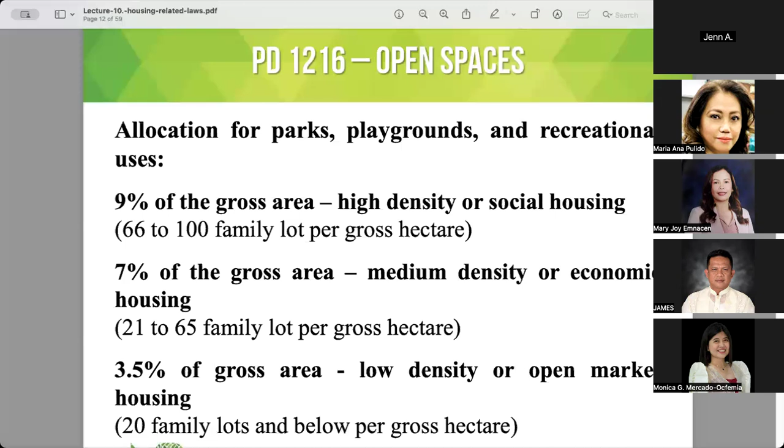Jen, would you like to share now? And also Mary Joy, if you can continue, and please read the provision.

Yes po, ma'am. Okay. PD 1216, open spaces, allocation for parks, playgrounds, and recreational uses. 9% of the gross area, high density or social housing, 66 to 100 family lots per gross hectare. 7% of the gross area, medium density or economic housing, 21 to 65 family lots per gross hectare. 3.5% of gross area, low density or open market housing, 20 family lots and below per gross hectare.

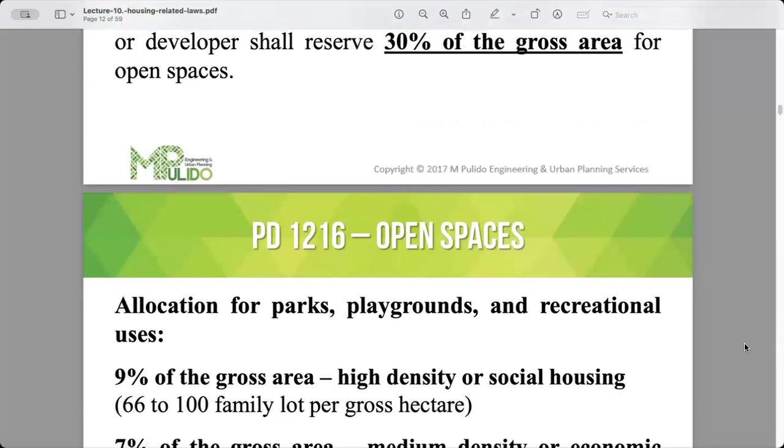Is that the one? Yeah, I think Jen, doon sa mas nauna. So can you read first that one? Okay. For open space, an area reserved exclusively for parks, playgrounds, recreational uses, and other similar facilities and amenities. Section 31, for subdivision projects 1 hectare or more, the owner or developer shall reserve 30% of the gross area for open spaces.

Okay. Mary Joy, in that particular definition, it says it refers to any area within a subdivision exclusively designated for what? Isn't it that we define open space? It refers to any area within a subdivision exclusively designated for what purpose? For parks, playgrounds, recreational uses, and other similar facilities and amenities. Okay, that's good. And then for Section 31, it says for subdivision projects with a gross area of 1 hectare or more, the developer is required to allocate at least 30% of the total area for open space.

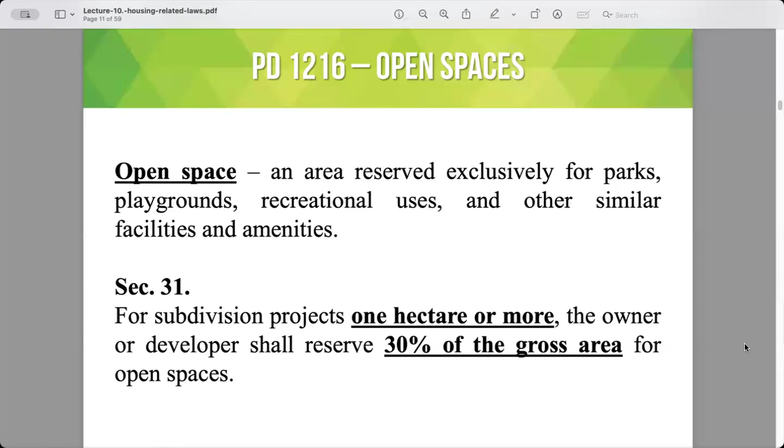So, James, if a developer has a 2-hectare subdivision, how much should be reserved for open spaces? Can you compute that? 30% of the 2 hectares is 0.6 hectares, or around 6,000 square meters po. Okay. So these areas are commonly where barangay halls, parks, multipurpose courts, or green buffer zones are located, and other similar areas. Thank you, Mary Joy and James. So we can now go to the next slide.

Okay. Allocation for parks, already read by Mary Joy kanina. So, let's see. Although PD 1216 originally mandated 30% open space, current implementing standards via HLURB, now DHSUD guidelines, classify open space allocation based on housing density, and so not all of the 30% is intended for parks and recreation alone. And we look at the breakdown that refines how much is specifically allocated for parks, playgrounds, and recreational facilities.

So, Monica, how much is allocated for parks and playgrounds, as you can see? Ma'am, it depends po on the density. Okay, and how about density? So for high density or socialized housing po, which means you have 66 to 100 family lots per gross hectare po, the allocation is 9% of the gross area.

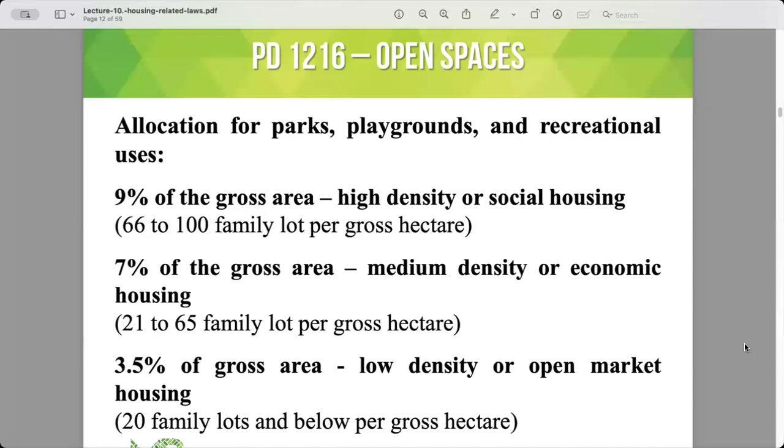So if I move to the next, Jen, can you move to the next one? Okay. And then I'll call again. Jumel, can you answer? Can you unmute? So, Jumel, can you recite again the allocation for the different types of density? Actually, ma'am, it's already revised. Okay. Actually, this is already revised, di ba, ma'am? Anyways. Oh, yeah, we're still talking about 1216 muna, no?

Opo. Okay. Bali, based on the code, PD 1216, 9% for parks and playground with allocation percent of gross area of 9, the total lots or dwelling units per hectare should be 66 and above. Yeah, 66 to 100 family lots. Okay, and then the medium? Yes, ma'am. 21 to 65 under 12-16, 7% of the gross area. Then 20 and below, 3.5%. Okay. So that's under PD 1216, pag tinanong sa inyo, okay?

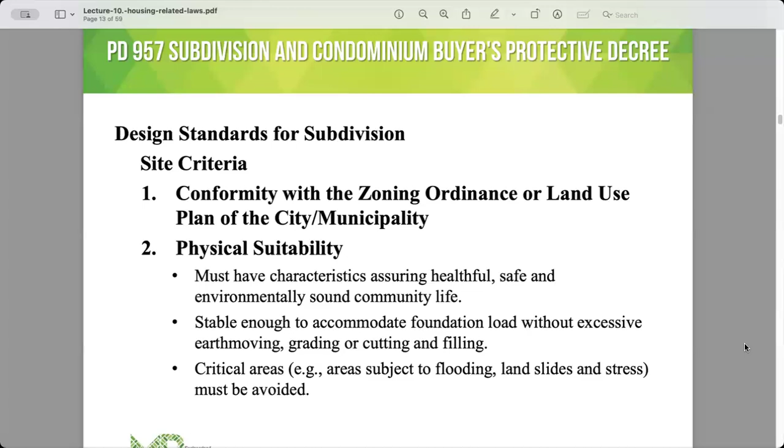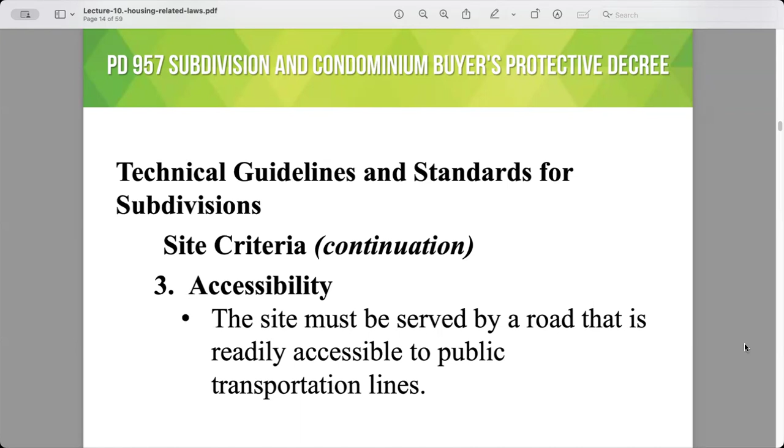So that would be okay now. And then, alright, we will go into the next one, Jen. Saan ito? Technical. Design standards. Hindi yung 1 and 2 muna dyan. Let's see. Alright. So that's the one. Sigford, can you read 1 and 2? Good evening po. Yes po, ma'am.

Design standards for subdivision, site criteria. Number 1, conformity with the zoning ordinance or land use plan of the city or municipality. 2, physical suitability. Must have characteristics assuring healthful, safe, and environmentally sound community life. Stable enough to accommodate foundation load without excessive earth moving, grading or cutting and filling. And critical areas, for example areas subject to flooding, landslides, and stress, must be avoided.

Okay. So under this one, PD 957 laid down mandatory planning and development standards to protect the interests of home buyers and ensure the quality and safety of residential developments. Number 1, read by Sigford: any subdivision development must align with the officially approved CLUP and zoning ordinance of the LGU. Conformity is very important because it ensures the project is located in areas legally designated for residential use and supports orderly spatial development. For example, you cannot locate a subdivision project in an area zoned for agricultural or industrial use unless the zoning is first amended.

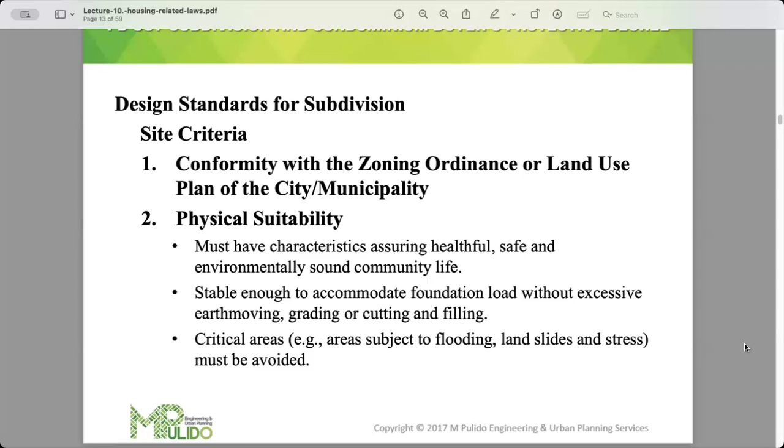Okay. So we can now go to number 3, Jen. Thank you, Sigford. Also, Mark, can you read? Yes, ma'am. Technical guidelines and standards for subdivisions. Site criteria. This is number 3, ma'am.

Accessibility. The site must be served by a road that is readily accessible to public transportation lines. So, for accessibility, the core principle is that every subdivision site must be reachable via an existing or proposed road network that connects it to public transportation lines or terminals. This requirement ensures that future residents can easily commute to work, schools, hospitals, and other essential services.

So, Mark, why does this matter in planning? Because, ma'am, it prepares the residents of the subdivision so they can commute, with easy access to roads. Yes, correct. So it directly affects livability, economic viability, and marketability of the housing project. It is on top of the main goal or core principle, which is physical connectivity.

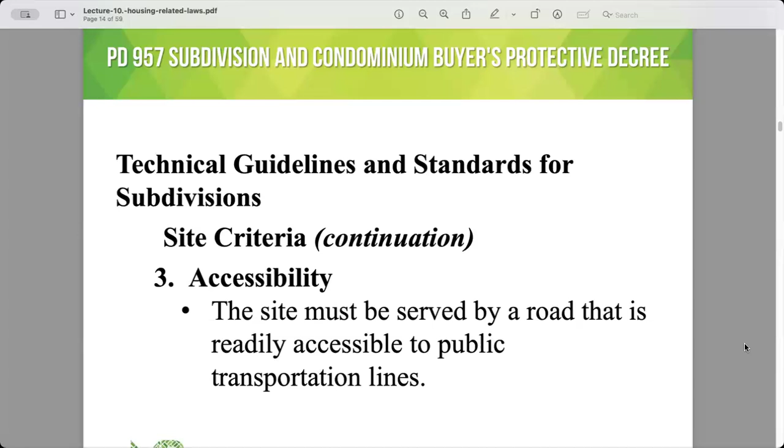Let me see. Jerome, please read. Hello, ma'am. Technical guidelines and standards for subdivision site criteria. Just a moment, is that the continuation? It was repeated. Okay, that's the one. Technical guidelines and standards for subdivisions.

Thank you, Jerome. So area planning ensures that subdivision design goes beyond lot cutting and road layout. It's about creating livable, safe, integrated, and sustainable communities. The following elements must be factored into the planning and design stages.

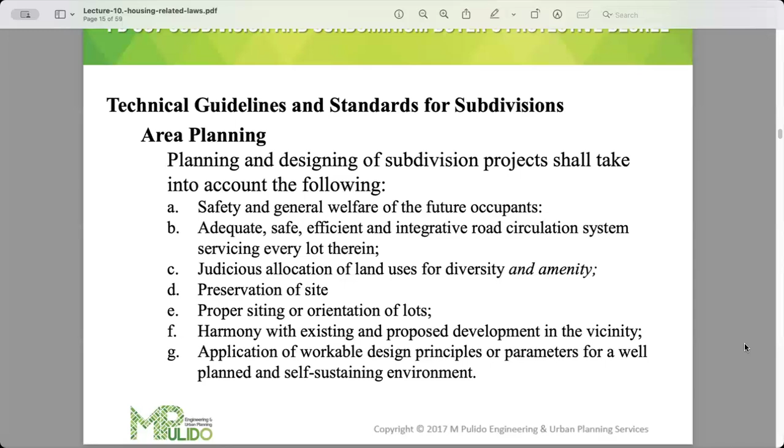So we can go to the next one. Where are we? It's still the technical guidelines on open spaces. Okay, let me see, that's the next one here. Mitchell, would you like to read?

Mitchell. Yes po, ma'am. Good evening.

Okay, thank you, Mitchell. So open spaces in subdivisions are more than a vacant land. They're essential elements that support mobility, recreation, environmental management and community health. So the technical guidelines under PD 957 ensure that open spaces serve multiple functions in a well-structured and livable neighborhoods.

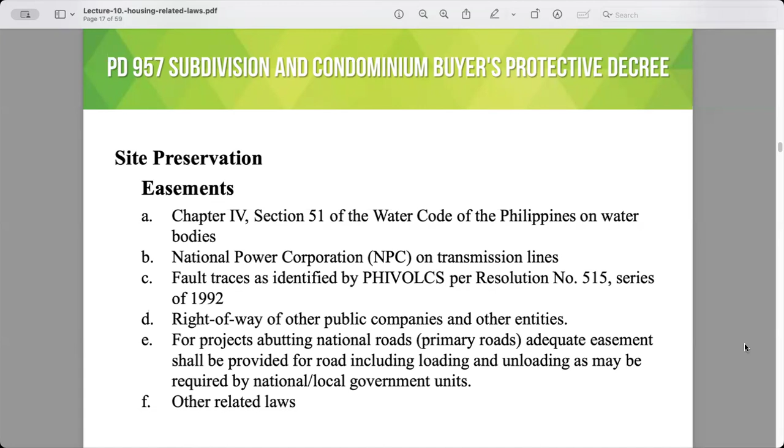We can go to the next one. Quite long, right? Ano na yung susunod? Okay. Next, alright. So, nasa ano na tayo? Kent? Hi, Kent. I hope you're still awake. Hi, Arnold. Si Arnold na lang. Baka nakatulog na po si Kent, ma'am. Jerome. Yes, ma'am. Gisingin mo ha si Kent. Contact him doon sa messenger. Sige. Arnold, hello. Ma'am, gising po siya. Ay, sige. Thank you. So, Arnold, can you read? Yes, ma'am.

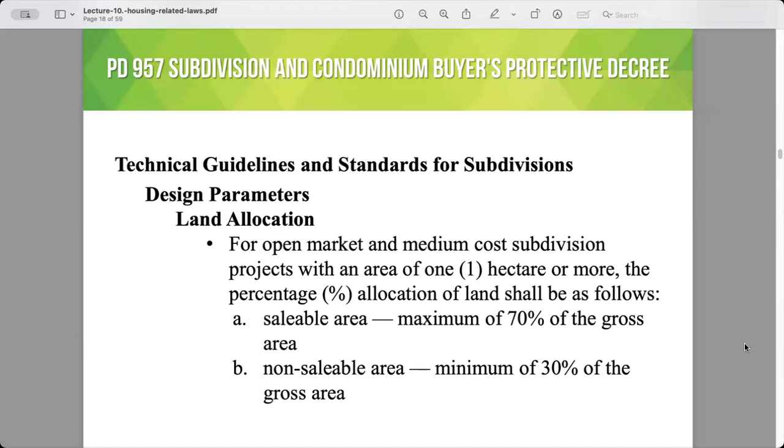Technical guidelines and standards for subdivisions, design parameters, land allocation for open market and medium cost subdivision projects with an area of 1 hectare or more. The percentage allocation of land shall be as follows. A. Saleable area, maximum of 70% of the gross area. B. Non-saleable area, minimum of 30% of the gross area.

Okay. So, there are still no amendments there, but there are clarifications and interpretative guidelines under the revised IRR and issuances of HLURB, and then there are also subsequent circulars from the DHSUD after it assumed its functions under RA 11201. So, let's see.

Subdivision developments, especially for open market and medium cost housing, must observe a regulated balance between sellable and non-sellable areas to ensure functionality, environmental integrity, and habitability. So for projects greater or equal to 1 hectare, maximum 70% of the gross area for sellable area. What does it include, Arnold? Yes, ma'am. Saleable area with a maximum of 70% of the gross area, ma'am.